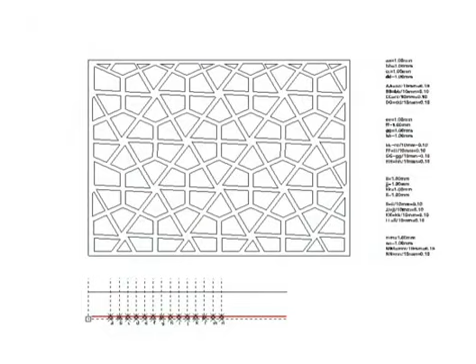Associative design is a parametric design technique using metric parameters to create an infinite number of variations. It is a technique based on associative geometry. Such geometries describe the relationship between various assemblies and constitute a design object as a mutually linked geometrical construction.

The term urbanization refers, within this research, to the original meaning given by Cerdà in 1867 as trying to describe the scientific methodology to construct the growth of cities through the relationship of housing and infrastructure. The form of knowledge produced by the methodology is the idea of types, a form of abstraction that separates the

essential from the concrete. This kind of typological thought fitted the native culture of our bureaucratic and capital structure, and became therefore the only architectural instrument for all kinds of spatial regimes, or what Cerdà called the 5 laws of urbanization: the technical, the legal, the administrative, the economic, and the political, with their forms of expression like regulations, laws, codes, and policies, and its content, namely the architectural building type.

Associative design research proposed an oppositional idea of typological thinking, what in biology is population thinking, a design approach of pure variations whereby a group of objects or family of buildings will be differentiated in various degrees and kinds. For the typologist, the type eidos is real and the variation is an illusion, while for the populationist, the type average is an abstraction and only the variation is real.

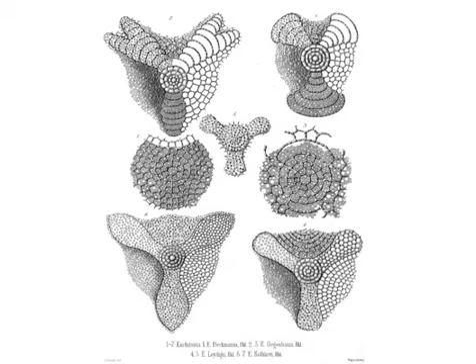How can we learn from non-planned settlements? What can we learn from emergent urban structures that evolve over time without a master plan or any particular authorship? How can we construct the synthetic vernacular? The aim of the research is to project new neighborhood models for Chinese urbanization. The idea is to overcome the homogeneity of social income groups and the sequential forms of ghettoization. The neighborhoods are designed as growth models. These structures are tested by their organizational potential to allow public programs to emerge over time.

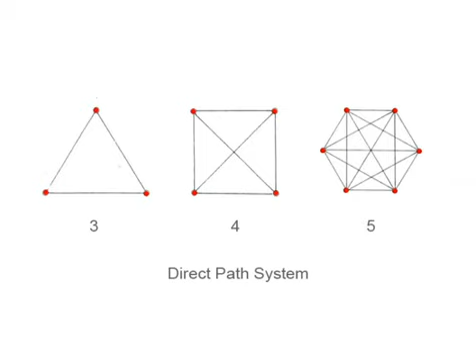In order to judge and define the organizational potential of the proposed urban networks, we have used the knowledge of detour systems developed by Frei Otto and Eda Schaur from the IL Institute at the University of Stuttgart. The research compared a series of planned and non-planned urban fabrics and defined their typological features in order to recognize its potential to adapt to future changes.

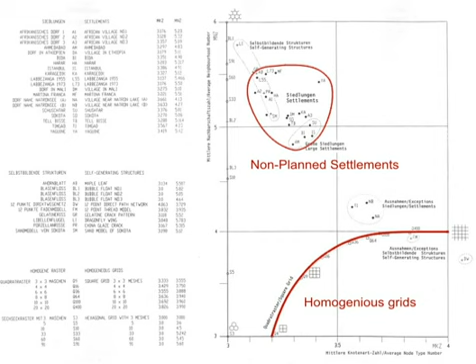The research mainly focused on the roles infrastructural nodes and their connections play in the process of formation of settlement structures. The understanding of these geometrical urban fabrics and the role detour systems played in facilitating these settlements are used as guidelines to evaluate our projects. The research is applied on a specific site in Zhujiajiao, within the Yangtze River Delta in the region of Shanghai.

Before 1840, in all Chinese cities and villages, independently of being planned, like in the case of Beijing, or through self-evolution, as in the case of the Yangtze River Delta region, the urban housing environments were based on courtyard typology arranged along land or water infrastructure networks. The courtyards are the private open spaces to the occupants.

Traditional courtyard houses had to be transformed due to the radical changes in population growth and social structures. The old-style Shikumen Lilong houses were derived from traditional courtyard residences typically found in the southern part of the Yangtze River around 1870. Most of these houses were 2 stories high, with a horizontal courtyard in both front and back. The organization of houses was similar to the traditional vernacular. This typology spread later to other open cities along the coast such as Tianjin and Hankou.

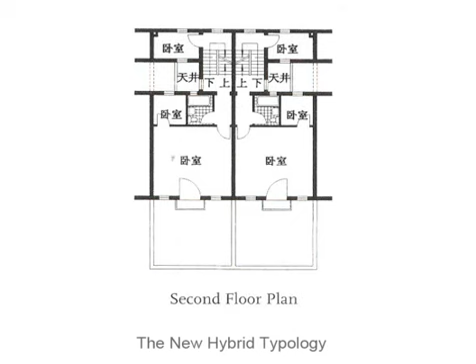Around 1910 to 1930, new hybrid typologies between traditional courtyard houses and Western, in this case English row houses, were developed. The main lane in the middle of each neighborhood gave the houses access to the urban environment. Until 1990, it is this hybrid that pioneered the city's landscape by providing a continuous field of private housing neighborhoods.

Until 1949, the city was characterized by concession zones with various housing developments and an enormous growth of slums around the peripheries. Between 1949 and 1957, the Soviet model was unquestionably introduced. This led to a new typology: single bedrooms along a corridor with shared facilities. The Russians not only introduced a new system of production but also the inner corridor housing plan, a spatial organization which was unfamiliar to the Chinese living conditions at the time.

As a reaction, this typology was transformed into a new form of courtyard apartments. This created a hybrid of Russian block with the traditional performance of climate control found in the courtyard houses.

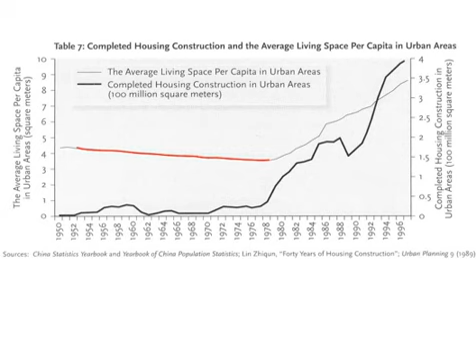Due to the Cultural Revolution between 1966 to 1978, new housing developments were almost in total stagnation. The per capita floor space has decreased from 4.5 square meters per person in 1952 to 3.6 square meters in 1978. In 1984, under the guidance of Deng Xiaoping, the Chinese government decided to move a planned commodity economy based on public ownership. For the first time, Chinese universities started to perform researches on new housing typologies.

Tianjin University performed research on design variations of housing units based on the Dutch principles of SAR developed by John Habraken for adaptable housing systems. In order to see the consequence of this policy, 3 pilot neighborhood projects are built in Wuxi, Tianjin, and Jinan. These freestanding housing blocks with large open areas are the prototypes of the current housing developments.

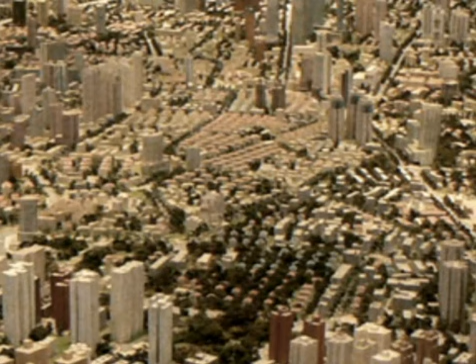The movement indicates the reform in marketized housing system that was no longer solely controlled by the government. Present housing typologies will emerge to suit modes of consumption, specifically focusing on individualization of social group targeted. Homogeneity is the result of standardization within one development. Today, 4 general housing types exist in the market: high-income villa type, row house type, mid-rise 6-story apartment, and high-rise apartment for the high-end users.

In opposition to historical research methodologies, in which typological thinking is used to abstract reality, the diversity of Chinese courtyard vernacular is measured by types with specific features. In our research, the goal is to understand the morphogenetic process of production and generation from the vernacular. Our main concern is, what are the forces that drive this diversity?

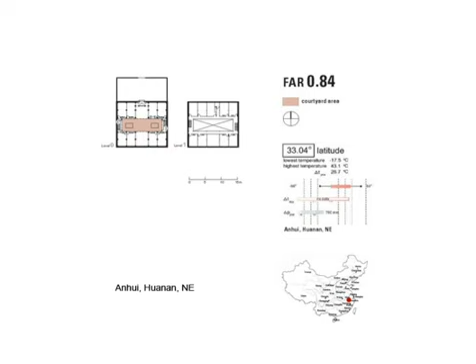One of the main forces that generates the organizational difference between Chinese courtyard houses is the climatic zone in which they are constructed. Depending on its location and local climate, the courtyard type changes its organizational structure from enclosed landscape composed of freestanding houses in the north to very small light wells in the south. The type's geometry is driven by outdoor spaces for climatic purposes. In the north, the courtyard acts as passive heating device, while in the south it performs as a solar ventilator.

The second force of the Chinese vernacular is the social formation of its arrangement. The organization of the residence is in accordance with the degree of publicness to form a pattern with progressive sequence. The courtyard operates as an organizational threshold between the public roads and the private household. Spaces where strangers, acquaintances, guests, and family members gathered for their routines have various degrees of intimacy.

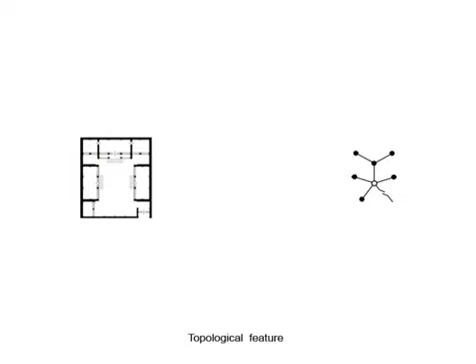Courtyard acts as the public center, embraces the inward complexity of a family, where the composition of rooms is based on the family structure. In terms of its topological features, the repetitive courtyard arrangement becomes the core of the overall organization. As the circumstance of the plot size, the expansion of the courtyard arrangement is longitudinal along north-south axis in accordance with the increasing room number.

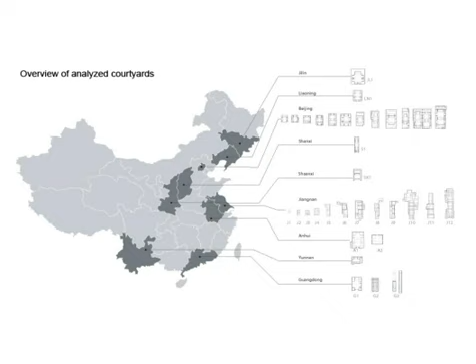Independent of their locations, all Chinese courtyard houses are never the same but still belong to one population of houses that have transformed and evolved over time. This type of differentiation is what biologists call population thinking, or the morphogenetic process behind the appearances of all members of a species. What is the architectural knowledge that has been used to produce this diversity?

Historically, associative devices do exist in Chinese culture to construct architecture. This model of associativity was especially used for monumental buildings, in the case of palaces, where geometrical construction was based on parameters that depend on the column diameter of one construction component called doukou.

Similar but less recorded and published in the West are Chinese building techniques used in housing construction. Various structural systems based on associativity depended on local economic status and the level of resources within the region. In Beijing, a system called Tailiangshi, again based on the modification of the diameter of the construction column, was used to accommodate the programmatic demand of the courtyard houses.

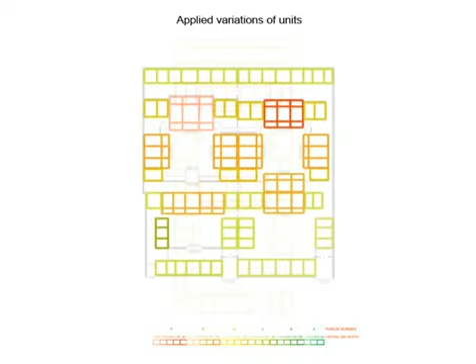In the canal towns of Jiangnan region, a lightweight structural system called Chuandoujia is often used. The structure is composed of roof purlins, which are directly supported by the columns below. By erasing some of the supportive columns, different programmatic demands might be accomplished by various spatial sizes created. The whole structural grid can readjust itself by combining with systems of Tailiangshi as a hybrid structure.

In the formation of a house, the structures are repeated through a room module called jian, and generated two-dimensional growth in order to accommodate various programmatic, social, economic, and environmental demands.

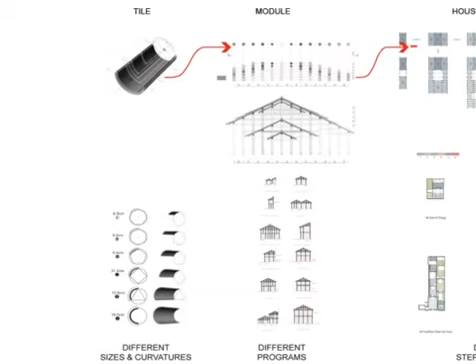In order to better understand the appearance of the vernacular, we conclude that throughout the evolution of these historic Chinese courtyard houses, their urban appearances and its morphogenetic process have been accommodated by a system of associativity, from the scale of the smallest manufacturing component to the scale of the urban environment. In each scale, new external forces affect the internal constraint of the geometrical model.

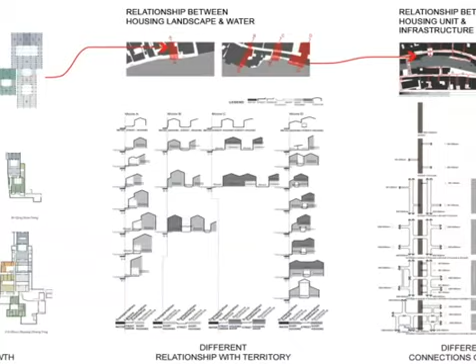In the case of Zhujiajiao Canal Town vernacular, the manufacturing process of the roof tiles affects the structural system. The repetition of the courtyard houses is organized along the country's water infrastructural systems, and its variation is articulated differently within each village. Constrained by the geological forces of the river delta, the villages evolve to their final layout of township by their specific economic industries within the networks of canal towns. The knowledge produced by its morphogenetic process is taken as material knowledge on which we have based our projects.

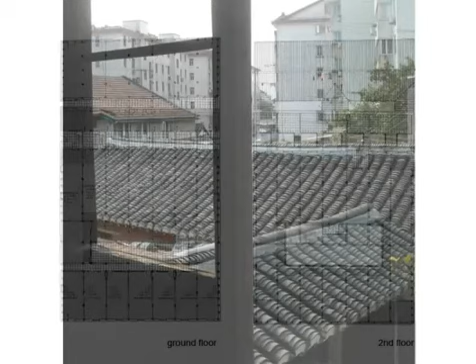What happened to vernacular building typologies within this period? The organization of the vernacular, the space that once belonged to one large family, was subdivided into small separated units for various residential groups. This has led to building extension such that the intended organizational, climatic, and social performances were totally changed. Courtyard houses vanished, and with them the associative knowledge from its heritage.

In the near future, it is projected that the region of Shanghai will have to accommodate 50 million people by 2050. Therefore, the One City, Nine Towns housing policy is developed for this region by Shanghai Municipality. Zhujiajiao is one of these 9 towns around Shanghai Central District, with its current condition mainly characterized by its historical heritage as one of the preserved canal towns. Developed over hundreds of years, this canal town is slowly being absorbed by Shanghai's new master plan. The new master plan is represented by its infrastructure network and plan for 300,000 residents.

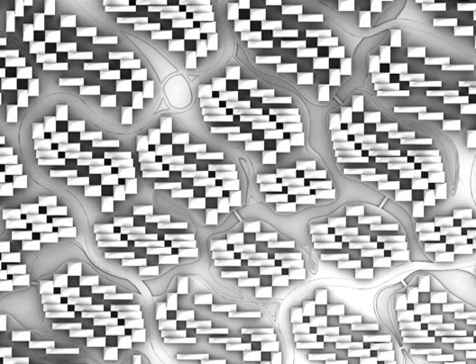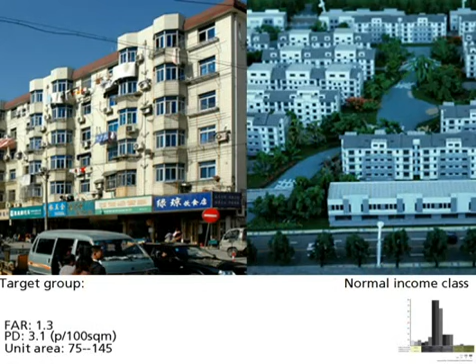Today, China is an overpopulated country with limited land resource to extremity. Therefore, the vernacular organization no longer functions as originally intended. The existing market in Zhujiajiao offers either economical mid-rise development with less living quality or high-standard housing for the higher income groups only. The project aims to achieve the low-rise high-density model with better living quality for different income groups.

Referencing the Chinese living culture and climatic performance, the north-south typology is the most popular one in the market. This geometric model provides longer south-facing width and natural ventilation from different orientations and tries to overcome the existing rectangular model. The inner corner of the L shape can be the private courtyard, while the outer corner becomes part of the shared collective space. The courtyard is formulated by putting several units in a plot. Generated by 2 identical rectangles, the plot transformed from pentagon to quadrilateral contains minimum 1 or generally 2 right angles, which are preferred to both construction and housing organization.

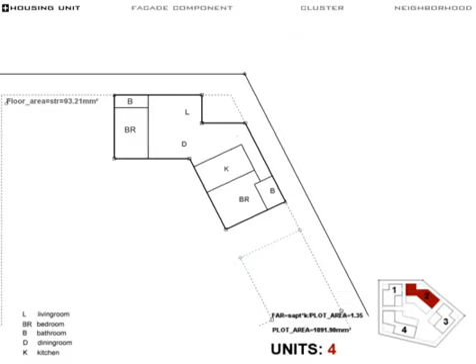By varying the size and configuration of the plot, the number of the neighbors sharing the same collective courtyard and the organization of the housing unit changes. Different FAR value and population density are created. The housing unit varies both in size and angle, therefore can accommodate different family structures, from single-person accommodation, nuclear family, to extended family, and offers various organizations for different income groups and individual preferences.

The floor plan of the lower level gives the basis for growth above. At the same time, it creates upper courtyards and different routes for each apartment, which is different from the existing staircase home linkage. The courtyards act as the transition between private and public, therefore the street courtyard home route is three-dimensionally created. The national regulation of providing 2 hours sunlight for each apartment on the specific day in winter is integrated in a geometric model. Certain distance and number of floors are automatically calculated.

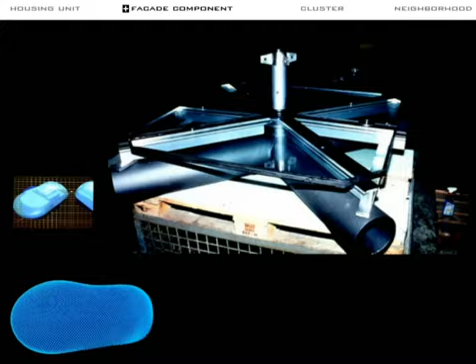Associative design is known as a high-tech approach. This project aims to apply this high-tech approach in China's low-tech construction situation. This means only identical components are prefabricated and adjustment is done manually, which is economically feasible in the local condition. This geometric model shows how identical components are linked together by adjustable components, therefore it follows any curvature and offers

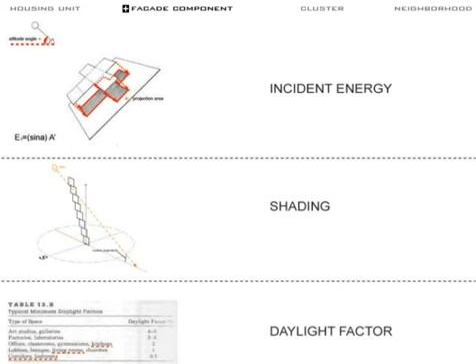different openings. Sun as the main environmental concern is considered through 3 aspects: incident energy, shading, and daylight factors. Incident energy is the technique to measure the insolation. It relates to 2 values: the sine of sun altitude angle and the projection area. The incident energy of a surface is calculated according to different orientation and tilted angle.

To maximize the solar gain in winter and optimize the solar protection in summer, a particular angle is calculated from the comparison graph. The result curve shows the best tilted angle for each orientation. According to the daylight factor graph, each function of apartment requires different sunlight condition, which determines the opening of the component. According to the temperature graph of Shanghai, from May to September, shading is required.

Each wall is the result of negotiation to these 3 factors. When the opening is wider, the shading factor is more influential, therefore the tilted angle is getting smaller, and vice versa. Therefore, each wall is differentiated in accordance to its orientation and function behind it.

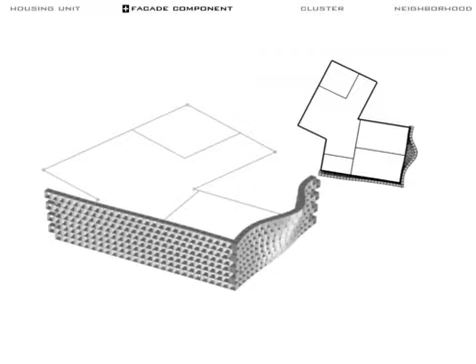A geometric principle of junction making, detour system, and the relationship between junctions and activities are considered. By assembling several plots together, different junction configurations emerged. Different boundary conditions and configurations of the junctions formulated by outer corners of the housing units are suitable for different activities.

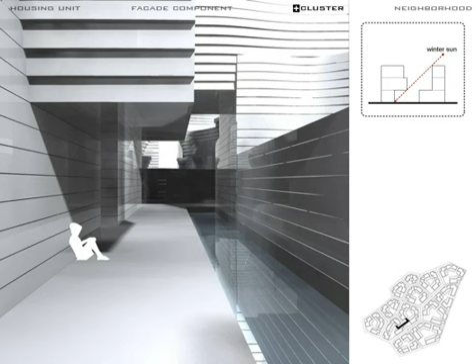The cantilevers of the units generate comfortable spaces which are exposed to the sun in winter but provide shading below in summer. This feature is particularly favorable in Shanghai's humid weather. These below spaces allow outdoor activities to happen in the rainy season.

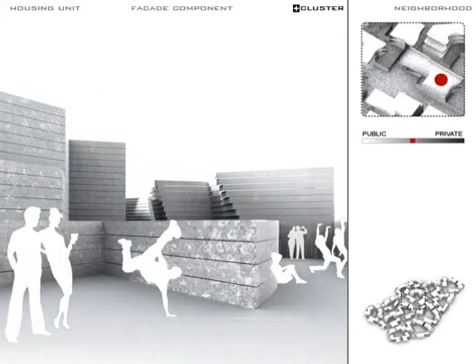A series of courtyards with different degrees of intimacy are created and therefore offer various spaces for different people and activities. Some upper courtyards can be shared by different families and therefore change the configuration of a relationship between families in different plots. The collective courtyards vary in size and configuration, and can accommodate different outdoor programs.

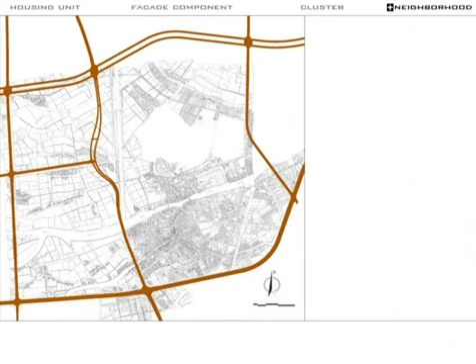The ancient canal towns are unique for their non-planned self-organizing nature based on the needed economic activities. This is unlike other Chinese cities where the formality and sizes are reflected by regulated planning. The existing master plan is based on subdivision according to the national regulation, and each subdivision area offers 1 housing type towards a similar income group.

In the long term, this kind of development occupies massive land in a short span of time, which is not suitable for sustainable growth. The intention of this project is to challenge the existing model by providing a wide range of housing types within the same development to achieve the social diversity intended. Following the economic principle, 2 driving factors of land evaluation are considered to differentiate the site in this scale: the noise and water landscape value.

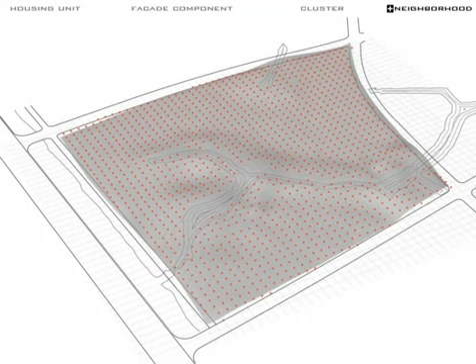A 10 times 10 grid is positioned on site. Each intersection point needed to be calculated according to the graph of sound power level and the distance towards the water based on the river width. As a result, the outcome points are differentiated depending on the position they are located. A land value map is generated. Each gradient of gray relates to different FAR value, income group, family structure, housing arrangement, and numbers of neighbors. By applying the housing plot on site,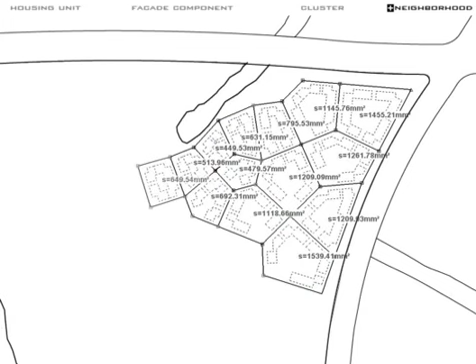Different simple strategies in accordance with the land value map are applied in order to generate a proper size and orientation of polygons to fulfill the economic requirements. As a scenario, the first growth completed when it contained approximately 600 people and 200 families according to the national regulation to the cluster scale.

With the integration of water, car access roads, and pedestrian paths into the unit, the network of the path system and junctions emerged and are evaluated. The values are decided by the evaluation adjusted through the Excel sheets.

Integration, which is used to estimate the frequency of use, mainly the pedestrian flow, has been calculated. Therefore, the width of the pedestrian and formation of the junction is determined. Parking is calculated to 0.6 to 1 car per family according to the plot size and housing standard located on the ground floor.

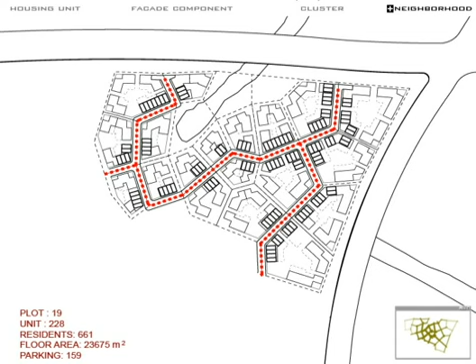To minimize walking distance, every unit has at least one side for parking, and this formulates the driveway. Different communal functions are placed to the most frequently used path according to the character of the path and the junction, and water is placed beside it to enforce the recognizability. The most accessible plot within the cluster becomes public space.

According to the economic principle, the most popular path from the existing cluster will affect the land value. Therefore, the next stage of growth will be based on the new land value map. According to the size of the site and population, 6 steps of growth are taken. The final result consists of parking system, pedestrian network, water system, public spaces, and program distribution.

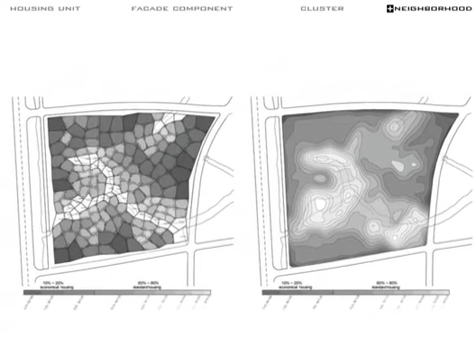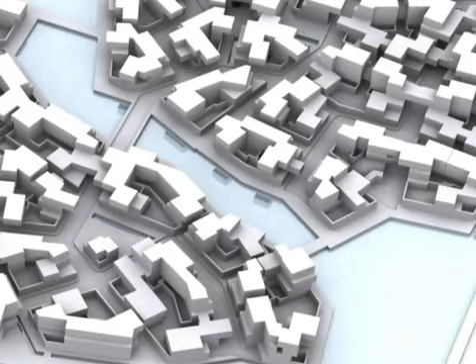What can we learn from the Chinese vernacular? Today, China's vast urban development is witness of its success in the nation's economy. To accommodate this rapid growth, the market offers building typologies in repetition, a way in which standardization is purely economically driven and offers no diversity within one development. Evidently, a building environment where comfort relied on natural mechanisms originally is now supported by less sustainable energy-consuming equipment. The project aims to start with this missing link by re-examining the role of courtyards from the vernacular to avoid centralized extension that happened to the existing.

What used to be the central feature of a house is now located on the building edge. The courtyard has the dual potential to be both private and public, allowing units to multiply one beside another, generating open spaces in between the building footprints as infrastructure or landscape. Geographically, the project is located in the alluvial plain of the Yangtze River Delta, where water is common in everyday life. The relationship between water and land is examined.

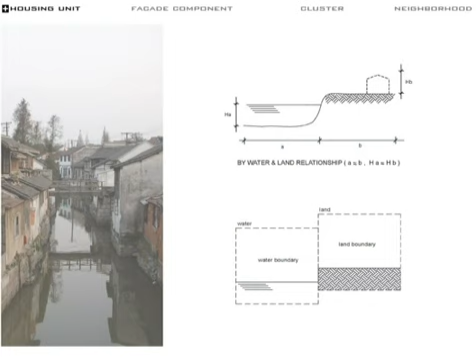Environmentally, due to their different thermal behaviors, the two obtain different surface temperatures throughout the day. This temperature difference allows natural airflow to occur between these two counterparts. In the Chinese vernacular, a ratio is given between courtyards in one house to activate the same mechanism. The difference in surface temperature is a result of different courtyard sizes and their locations that verifies the different degree of sun exposure. This is particularly favorable in summer when temperature is high and the air is still. The mechanism ensures to bring cooler air into the house both day and night.

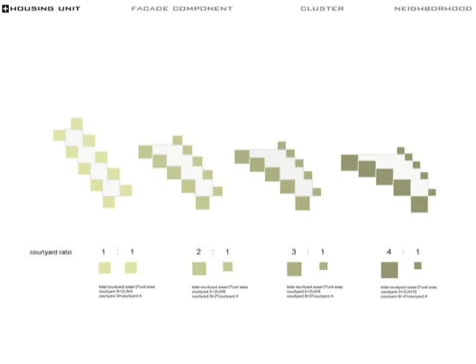Consequently, in the unit scale application, the difference in courtyard sizes generates variation in the housing plans. Rectangular unit footprint is the result of this geometrical model. Depending on the width and length ratio of a unit and its constraint to the internal layout concerning ventilation, the elongated shape with its corridor typology is chosen as communal accommodation targeted for young urban migrants, while the squarish formation with its centralized quality is more suitable to family organization.

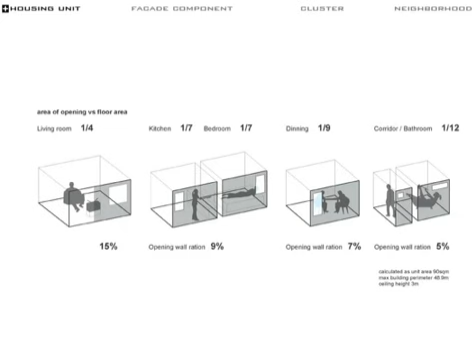It is regulated in housing environment. Each functional area has a given percentage of wall openings. The living room standard is chosen for the maximal requirement, calculating an opening ratio of 15% to the total floor area for this model. When assembled, individual units can merge together, optimizing the building envelope to achieve the optimal 15% opening surface ratio. This operation allows a maximum of 4 units joining together sharing one internal courtyard. These variables in unit layout facilitate different social interaction through courtyard distribution with surrounding units.

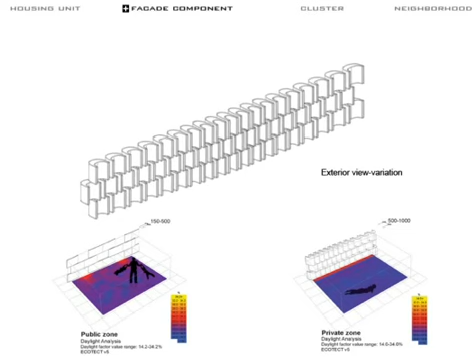When dealing with the level of intimacy as well as the thermal comfort, the degree of difference is reflected by its facade element. All components have the same volume. In the private zone where intimacy is required, the number of U-shaped components increases. As a result, the components act as vertical shading devices, resulting in deeper recesses which permit less visibility and some penetration to the interior, but their thickness acts as the thermal mass of the house. In the communal area where sunlight entry is preferred, the U-shaped components are wider but thinner, with larger openings for better sun penetration and visibility between inside and outside.

Two means are essential to the construction of the cluster. First, the area ratio between the housing unit and its void components. Second, the size ratio between the small and large voids. When assembled, the voids can be either enclosed as private courtyards, shared between units, or opened for public access. This generates variation in the cluster model.

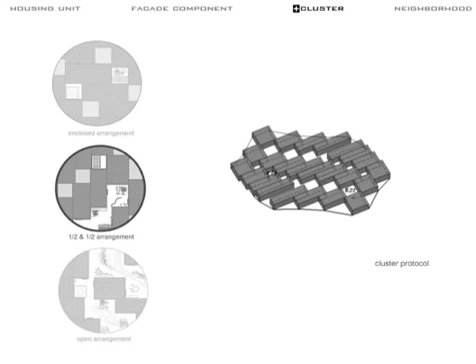Cluster with all courtyards enclosed, half enclosed and half opened, or fully opened to accommodate different social and environmental qualities. The standard unit of 90 square meters is used to accommodate Chinese market standard and the minimum cluster size achievable. The sizes which are generated by different wall ratio of the starting units are also determined by environmental boundaries on site. Two parameters are used to control the growth on site.

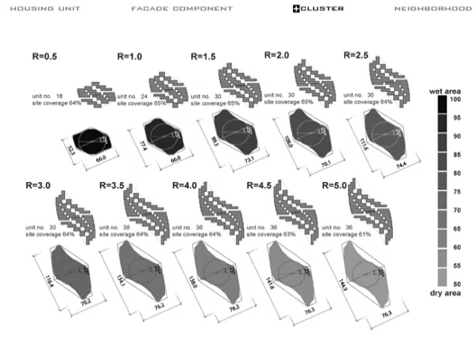First, the size of the cluster is directly related to the wet and dry boundaries established from the existing canals. On a given size of land, a field of smaller clusters generates longer perimeters in total for waterways in comparison with the larger ones. As a result, smaller clusters are populated on wetland and larger ones vice versa. With the environmental intention, the larger open landscape in between and within the clusters have the potential to facilitate excess water in the flood season if required. Each growth is generated by its adjacent neighboring clusters depending on the degree of water containment it is located.

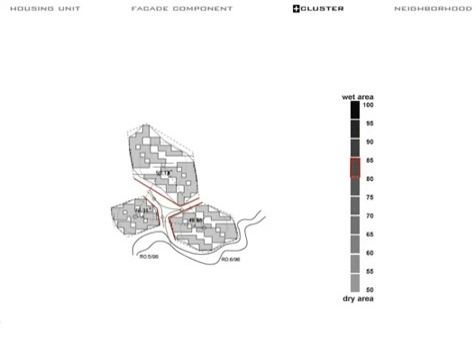The second constraint, generated by the prevailing winds, is operating the height factor. To block the cold winter front from northwest direction, the roof plane is the highest on this corner. The building height line is then trimmed towards the southeast edge to maximize wind penetration in summer when the climate is hot and humid. The same principle also applies to the unit roof to identify the location of the highest pitch point in the roof profile.

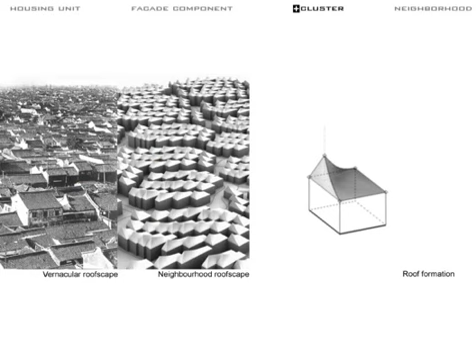Parabolic curvature is applied to generate roof surface in direction facing the monsoon season. An idea which is adopted from the vernacular is to shed the surface water off more efficiently while still provide shelter from the northwesterly. In each stage of the growth process, the initiating water content is the only known feature. A minimum of 10 to 15% water coverage is required in this region for flood control.

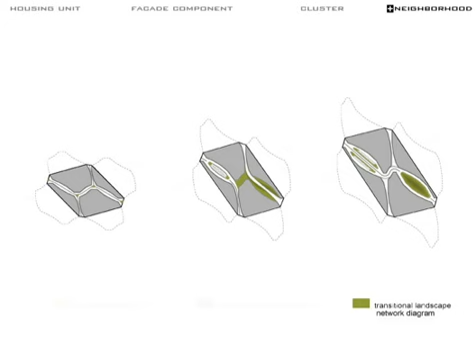To complete this neighborhood model, 3 networks are considered. This includes road infrastructure, water infrastructure, and landscape element that transits between the wet and dry territories. The wider the width between the cluster formations, more possible layers of networks can be implanted into the system. Taking the canals as the boundaries, vehicle access roads are firstly evaluated through the hierarchy of number of intersection nodes for the 3 sectors. To minimize coverage for vehicle roads in each sector as independent traffic loops, secondary detours are integrated into the network for connectivity and distribution.

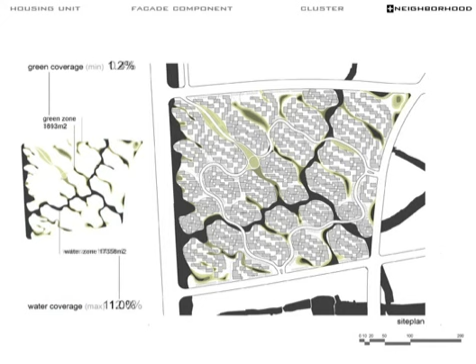Free open spaces are meant to be terracing landscape, designed purposefully for water infiltration, an environmental device to collect not only the storm water, but also transform as the extension of a river valley in the flood season. The resulting landscape constantly changes in accordance to its environment, accommodating different seasonal social programs. For pedestrian network, bridges are interlinking the sectors approximately every 65 meters to maximize communication within the neighborhood. All crossings of these 3 networks have the potential to accommodate or initiate uses other than residential, depending on the network combinations and their locations.

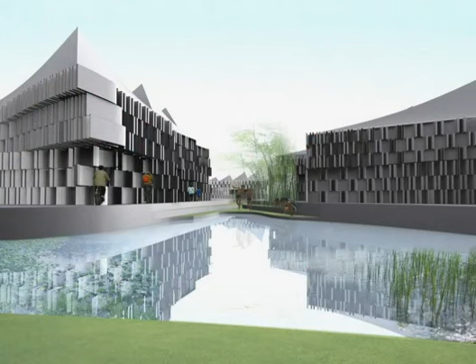Focusing towards social diversity and environmental sustainability as intended, the evaluated vernacular forces are integrated from the unit arrangement to the overall neighborhood scale. From the concept of privatized courtyard to public infrastructure and landscape, the quality of vernacular is synthesized and reinstated in this low-rise, high-density development.

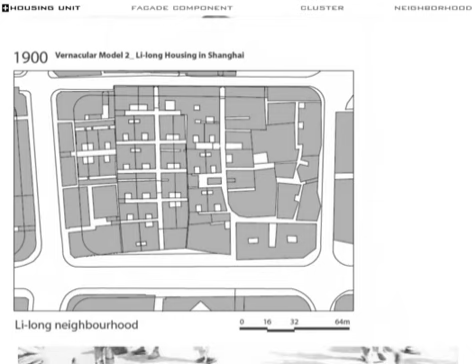The ambiguity of vernacular void spaces, which appear either internally as courtyard typology or externally as linear street formation, has generated a fascinating living experience. Around 1900, the arrival of foreign capitalism brought a dramatic social change in Shanghai. A new kind of neighborhood structure called Li-long emerged. Again, the organization of Li-long neighborhood has generated a hierarchical layout, where void spaces as powerful container trigger the emergence of all kinds of activities and encounter of all people.

The intention of this project is to learn from the spatial organization of the vernacular models, aiming at exploring possible model of modern Chinese living quality and offering alternative strategy for middle-income people. The current housing market delivers an effective typology following a sophisticated logic of room arrangements.

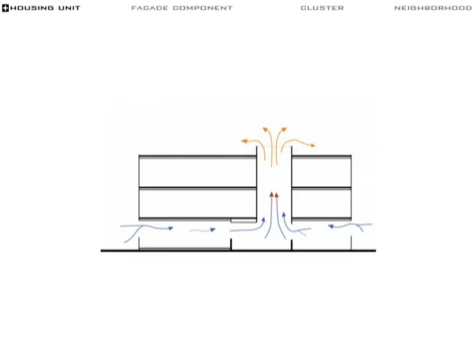The analysis of 90 square meter standard plans suggests the potential in the core living area where a void space can emerge. A private skywell performs better for lighting and ventilation. More importantly, its spatial quality creates a modern way of Chinese living. However, the formal unit varies. The skywell is in between the active living space and still zone, generating a rich package of room arrangements.

Rules are set with the constraints of the staircase to ensure the homogeneous quality to all the skywells. Skywell in each floor negotiates with each other to give spaces to one above or below. This results in a semi-exterior space individually and together forming a three-dimensional void space. Multiple options can be offered to people with different social status and preferences.

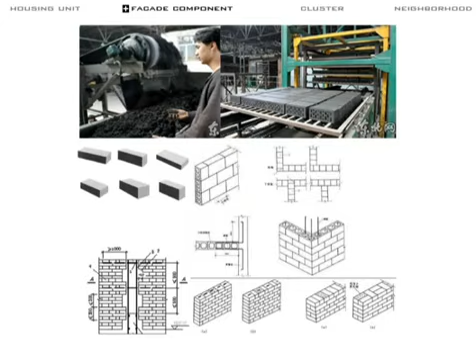In the vernacular, brick is the main construction material. To provide the maximum privacy for housing units and to ensure the environmental performance, a facade made of coal brick is proposed. Each brick with specific orientation reacts on its position within the facade and on the sides of the courtyard with horizontal rotation and offset to the next brick.

Therefore, the views from inside and outside could be precisely restricted and at the same time guarantee sun shading in summer, sunlight entrance in winter, and cross-ventilation in all seasons.

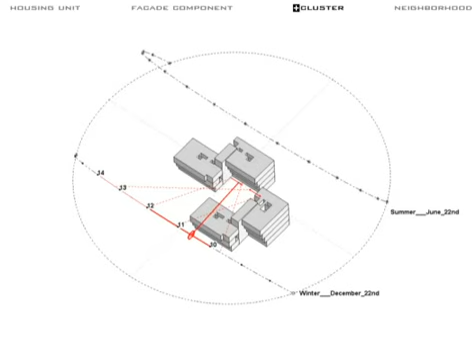A public courtyard can be created by the composition of two pairs of units. The dimension of the courtyard is defined by sun regulations and perception of the space itself. By shifting the position of the housing units, the amount of entrances and density varies. The characteristics of the courtyard is generated by the containing components.

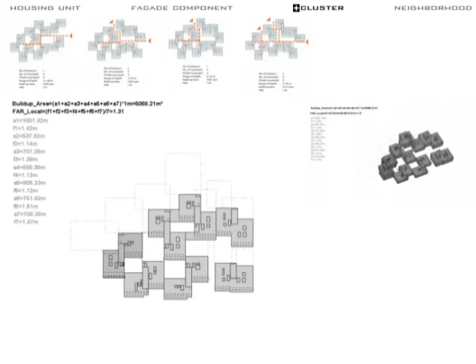The repetition of courtyards result in different junctions and street patterns. These patterns can be specified through local controls on road bifurcations and exits, therefore creating a certain depth, which defines accessibility and collectiveness.

According to the Chinese housing regulation, one of the main forces driving the planning is the distribution of programs. In opposition to the existing top-down assignment, a program-guided system is established. Each program requires particular conditions in terms of land use, ground areas, location, and preferences due to the domestic behaviors. Therefore, the sizes of courtyard always adapt to accommodate different programs.

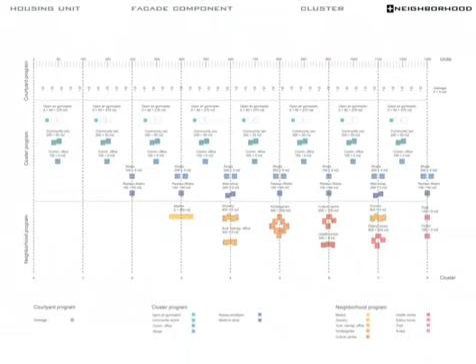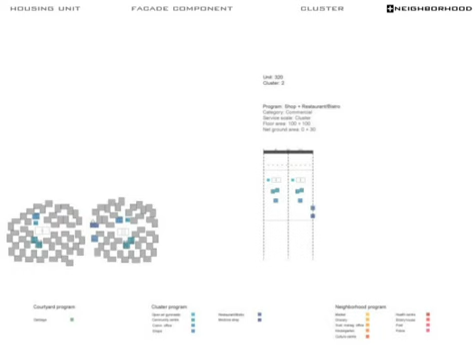As the amount of housing units increases, new programs emerged to meet the local demands. Once the service radius reaches its limit, a local center is formed and then comes a new population. After the second local center is also recognized, commercial programs appear in between and turn into the new center of gravity. The further the growth continues, the more complex the hierarchy of program centrality gets.

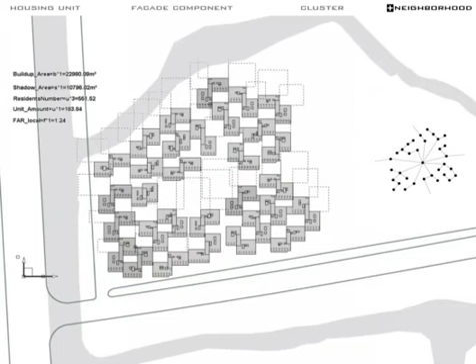The occupation on site is the application following the logic of programming regarding the ground condition. The morphological process performs in an associative relationship with one affecting the other. Infrastructure appears after a certain depth is created. It provides a basis upon which programs in different domains and locations can be created and set up to reinforce the vividness of living environment.

The master plan comes out as a result of negotiation between environmental, political, social, and economical factors. The new neighborhood is decentralized into a mass of islands divided by canals. Entrances to the neighborhood and the width of motorway are restricted to the minimal, encouraging the pedestrian quality internally. The infrastructural configuration of the neighborhood displays a network of different degree of intimacy.

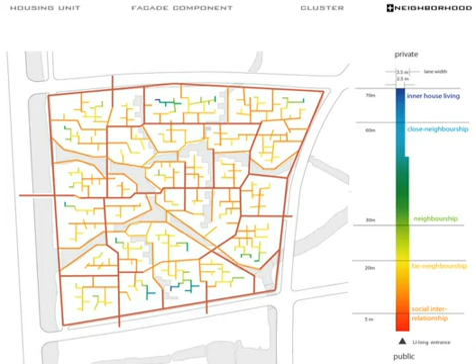The programmatic use of public spaces reflects similar performance as the Lilong neighborhood does. Road linkage to all islands are mostly occupied by the intersocial programs such as retail facilities. Communal facilities possess the main crossing, encouraging a dynamic population flow. Secondary road junctions will concentrate the population flow, and at the end of the branches, only close neighborhood occurs.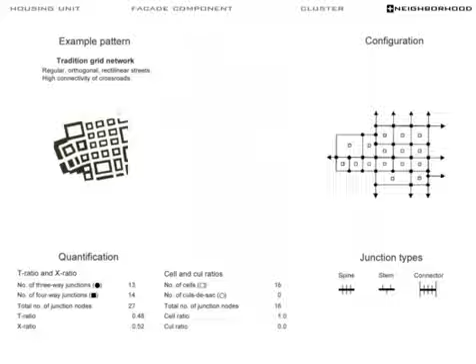The street patterns turn out to be a mixture of configurational properties of moderate connectivity. It is neither like a typical modern suburban layout, loop roads with tree-like configuration of low connectivity, nor like a traditional grid network, which has regular orthogonal rectilinear street with high connectivity of crossroads.

The frequency of the T ratio and X ratio, as well as the diversity in junction types, ensure an efficient circulation system without losing the hierarchical accessibility, producing the ambiguous perception and a sense of security like the vernacular does. The evaluation of all the clusters display a complexity the system generates. The richness of the neighborhood model is proved to be able to offer various options for the wide range of targeted groups.

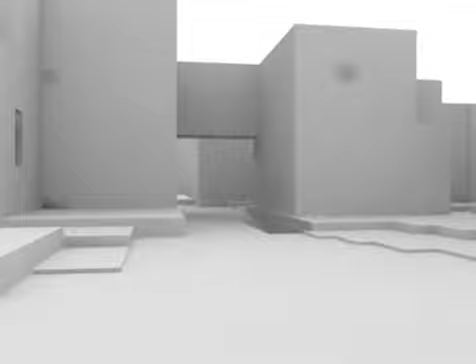In traditional Chinese culture, courtyard, which embodies the centrality of housing organization, is one space to tie the family together. Nowadays, in the emergent cities of China, following changes in family structures, the original meaning of courtyard was missing. The intention of this project is to reintroduce the idea of the courtyard into contemporary housing production.

In Chinese society, eating culture plays an important role for Chinese people. Therefore, the central hall consisting of dining and living spaces becomes a considerable focus of the house. In order to create the central hall within the housing unit, while keeping the characteristics of the space, the shape of the living dining room can be deformed around the three axes to maximize its flexibility to accommodate different household compositions.

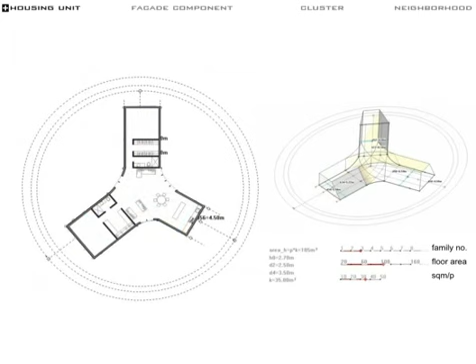Referencing the existing housing market, the available sizes of residential housing units are determined by different income groups and their demand for floor area. Higher income group acquires more floor area. On the other hand, this diverse unit also offers same floor area, but different living life qualities for nuclear family, multifamily, dormitory, or Soho housing unit.

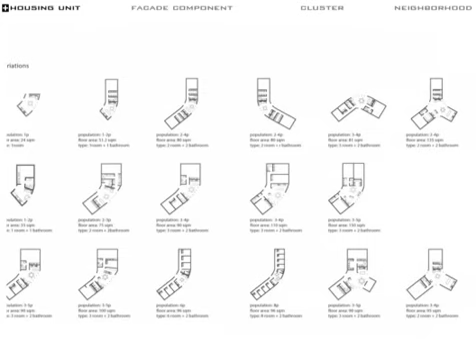By rotating the direction of housing units on each floor, it purposely produces multiple open spaces in the junctions of the fabric structure. This newly generated multiple-choice combination acts upon the private courtyard as balcony or garden, as entrance or crossing path, which further extended the centrality of the housing units.

The local inclination of unit facade is suggested by solar azimuth in order to acquire the optimal radiation. The facade is generated by different pitch sections due to its orientation. The envelope, while providing sufficient shading, suggests a differentiated level of intimacy which arises between the internal planning of the units and outdoor courtyard spaces. The openings of the shading device are calculated to shade either one single or multiple units.

Housing units, as skeletal components, are constituted to generate diverse morphological transformation of courtyard spaces and to assemble various collective courtyards. Furthermore, it drives the interaction between inside and outside, public and private.

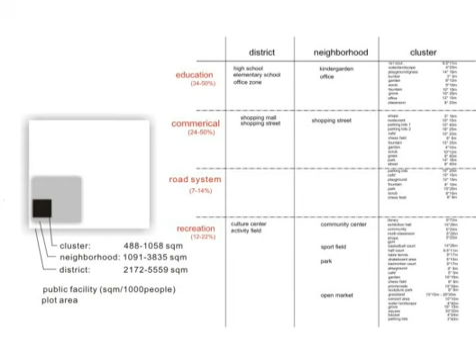The local policy determines the occupational functions, which include education, commercial, and road system. The collectiveness is through the progress when principal requirement of each primary function, such as accessibility and security, is combined. The series of intermediate programs emerge to interlink housing clusters with relevant function needed for communication within.

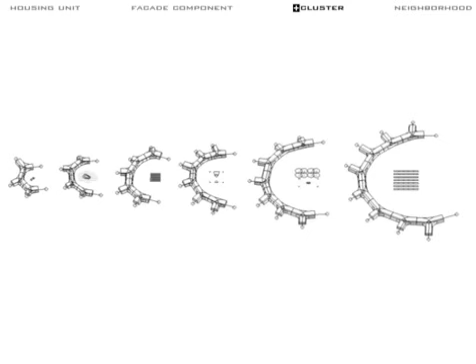Housing units are organized with the collective courtyard, which varies in size and shapes to address different programs that provide a range of social interactions. The accessibility of each exclusive courtyard depends on its inner programs and functions of surrounding housing units. Courtyards with multiple communal functions start the cluster.

The gradual effect of the clustering exists in the allocation of several different neighboring programs, which creates linear, centralized, or scattered layout. They generate various newly functioned, articulating housing units, which have different contribution to public interaction in the local community.

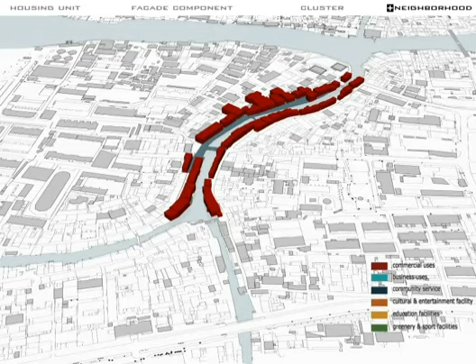Taking Zhujiajiao as the reference, the program appeared from infrastructure and local demand. The growing zone gradually progressed from an interaction point on site, following the sequence of commercial, educational, and communal use. Furthermore, the urban fabric is extended, containing more multifunctional communities.

The expansion of the cluster initiates with homogeneous housing units with attached courtyard space that is controlled by environmental condition, providing a non-diversified living condition for the inhabitants. The process proceeds by units proliferation, when the units embedded into the site, connecting to its neighbors. As the population reaches a specific number, the program emerges out of homogeneous cluster.

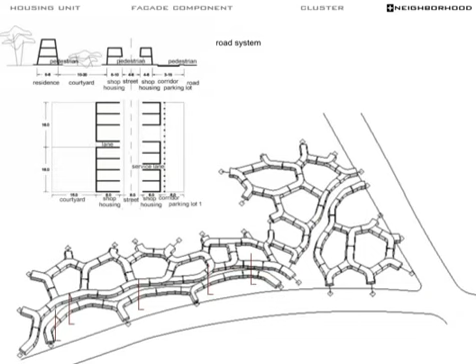The road was opened for accessibility and public use, such as shopping street or parking lots, for visitors and service use. Private pedestrian access is also provided, allowing a fluent conjunction through the neighborhood by its communal open space.

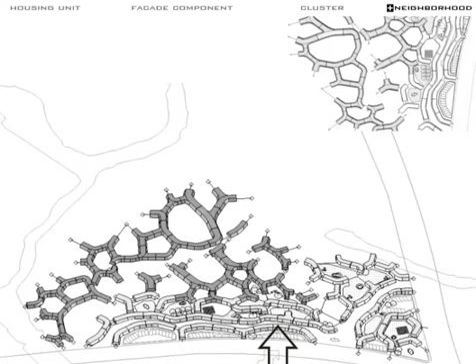According to this regime, which is embodied in the organization itself, are four crucial programs preceded by the requirements. First, the shopping function creates a linear street and links to the main infrastructure. The office zone disposes an open road to the public, servicing parking lots for visitors and also inhabitants.

The recreational zone is composed with natural field and multifunctional structure such as exhibition hall, library, gymnasium, park, or sports field. The kindergarten provides a safety area for children and links to its neighbor for security concern. As a result, the clusters are unfolded into the site, forming the new neighborhood model.

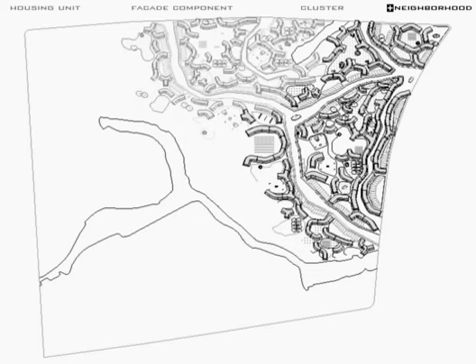Collective courtyards generated by various housing quantity. The essential quality of the courtyard is determined by the reciprocity among the neighbors in terms of programs, how it generates continuous routes to connect each housing cluster, not only to access from the external entrance, but also in accordance with the program. The individual housing units link to specific outdoor spaces in the neighborhood for better communication and participation.

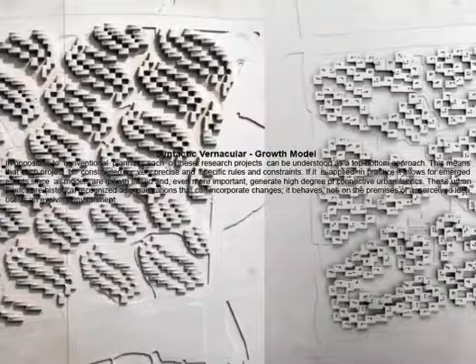In opposition to conventional planning, each of these research projects can be understood as a top-bottom approach. This means that each project is constructed by very precise and specific rules and constraints. If it is applied in practice, it allows for emergent effects, since all models are growth-based, and even more important, generate high degree of connective urban fabrics. These urban fabrics are historically recognized as organizations that can incorporate changes. It behaves not on the premises of a preconceived idea, but as an evolving environment.